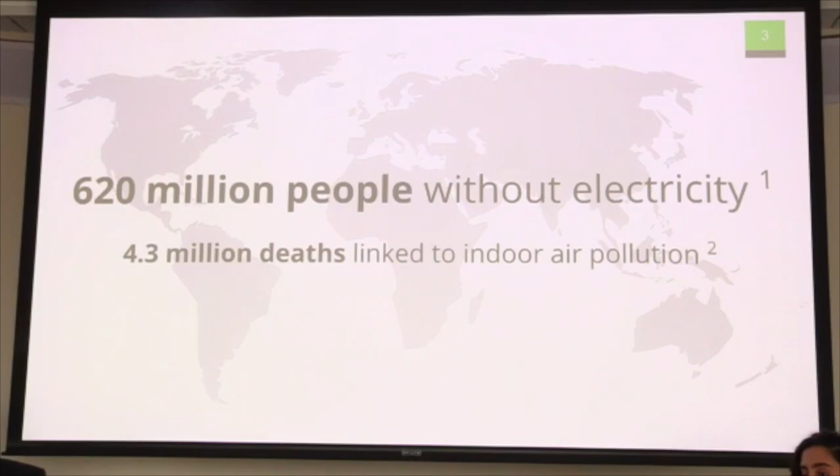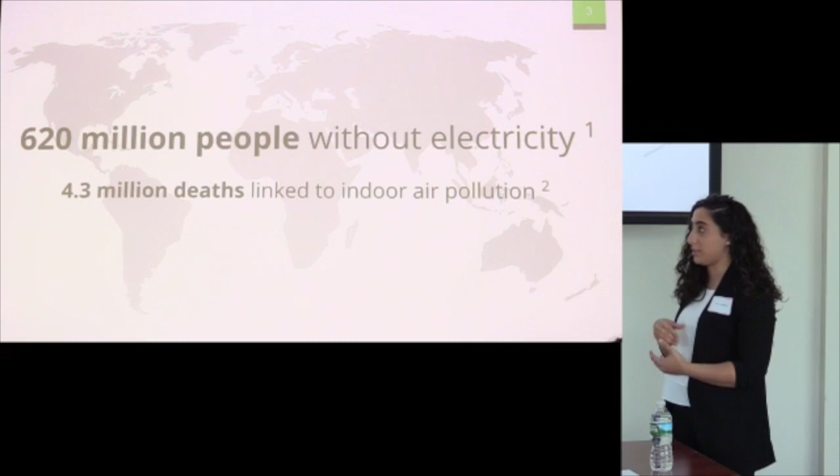It is defined as a lack of adequate modern energy required for cooking, warmth, and other services in schools, healthcare, and workplaces. Currently, there are 620 million people without electricity, and this is required for the continent's effort to overcome poverty. Without this electricity, they rely on the burning of dung, charcoal, and kerosene, which are both dangerous and polluting. This increases the number of deaths linked to indoor air pollution, which the World Health Organization estimates to be 4.3 million deaths.

So who are we? We are Quad A. We're located in Saudi Arabia purely because we're situated in the region and it's easier for us to start up the business there, as well as additional benefits such as cheap rent and low taxes.

So our company is focused on research to deliver electricity in a reliable, efficient, and environmentally sound manner. In the future, we hope to see a world where people all over the world, even in remote locations, have access to clean water and environmentally sound house appliances.

So our objectives come in twofold: product objectives and social responsibility. The product objectives are included in product development, and so we hope to provide users with a reliable, efficient, and inexpensive means for clean energy, a place for proper waste disposal, and a process for non-potable water. This ties in with our social mission of creating awareness for energy poverty, the consequences of improper waste disposal, and the need for proper sanitation.

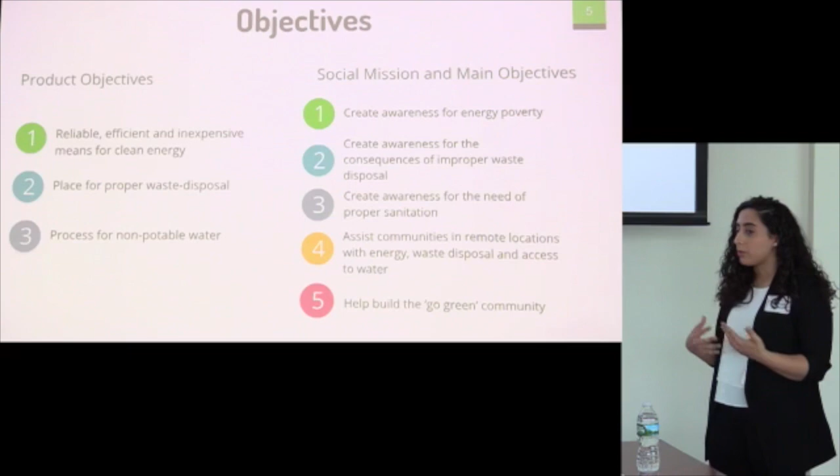In addition, we also hope to assist communities in remote locations with access to energy, waste disposal, and water. And furthermore, we want to help build the Go Green community.

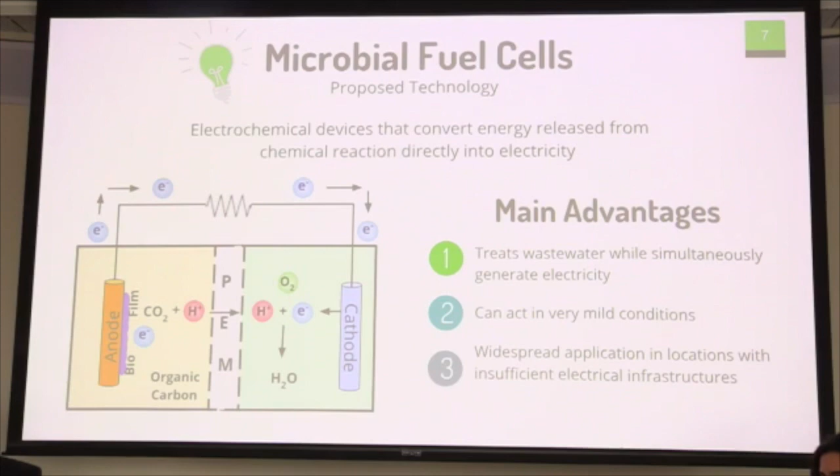Now moving on to the product, we have looked to several products that we think are suitable, but we decided to focus on one of them, which is microbial fuel cells, which are electrochemical devices that convert microorganisms into electricity directly. That comes with advantages.

One, it mainly treats wastewater while simultaneously producing electricity. Also, it can function under mild conditions, so there are no changes in the atmospheric conditions of the device. Its application can be applicable in any location that has wastewater, so it's applicable to areas that lack infrastructure or electricity.

So for this device, it functions as follows. You have two chambers, an anode chamber and a cathode chamber. In the anode chamber, you put in the organic compound, and it reacts and also forms a biofilm around the anode.

Then the electron transfers through the anode, through the electric circuit, to the cathode, then is released to the cathode chamber. It reacts and combines with a proton, which is transferred through the proton exchange membrane to form H2O.

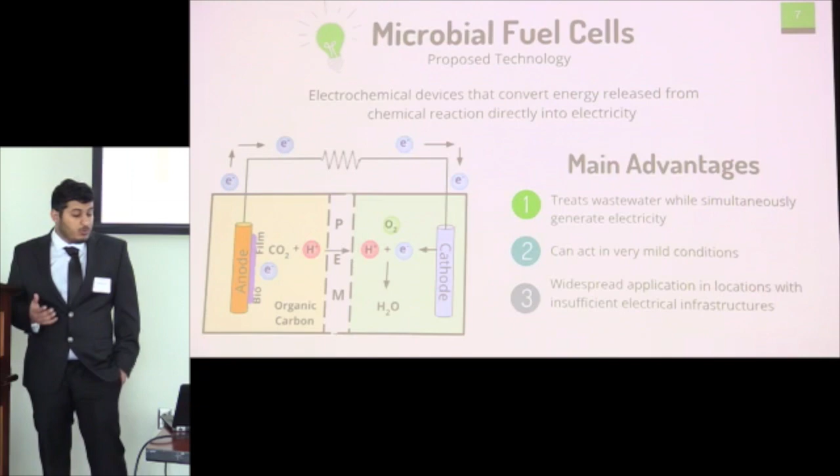So how does all this reaction actually happen? In the anode chamber, we have an anode reaction, which is organic compound plus H2O, forming carbon dioxide, a proton, and an electron.

Then it transfers through the biofilm through three different mechanisms. The first one is direct contact between the bacteria and the anode, and the second is through the nanowires that come from the bacteria, or by a mediator.

Then the electron transfers to the anode through the electric circuit, then goes back to the cathode, where the cathode reaction happens, which is based on oxygen plus 4 protons plus 4 electrons, forming 2H2O.

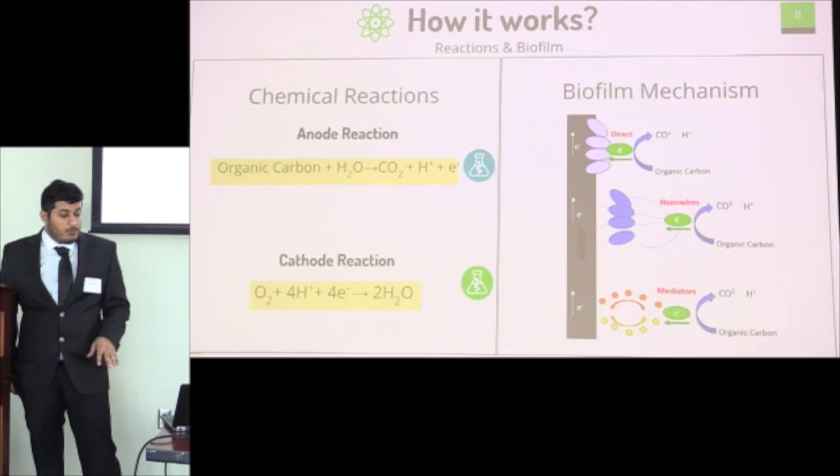All right, so there are several modifications we have applied to our design in order to reduce the cost of our final product while maximizing its efficiency.

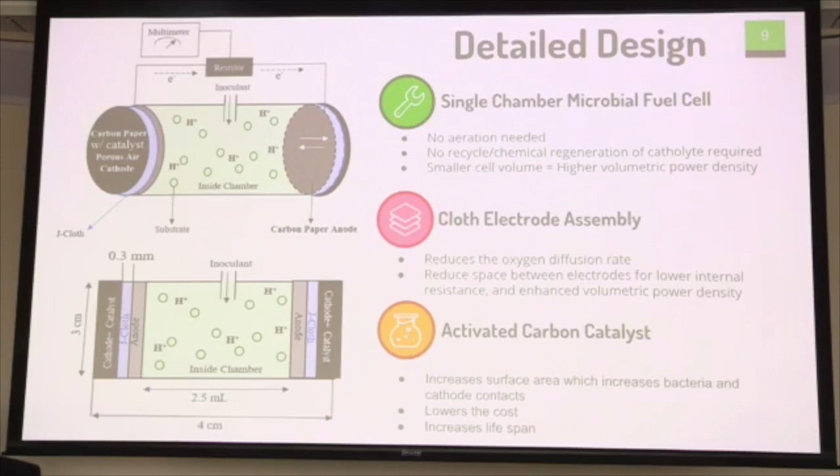So first off, we have completely gotten rid of the second chamber. Typically, when you have two chambers, the cathode is immersed in a solution and has to be aerated with pumps to provide it with oxygen. The issue with this is that it adds to equipment and energy costs.

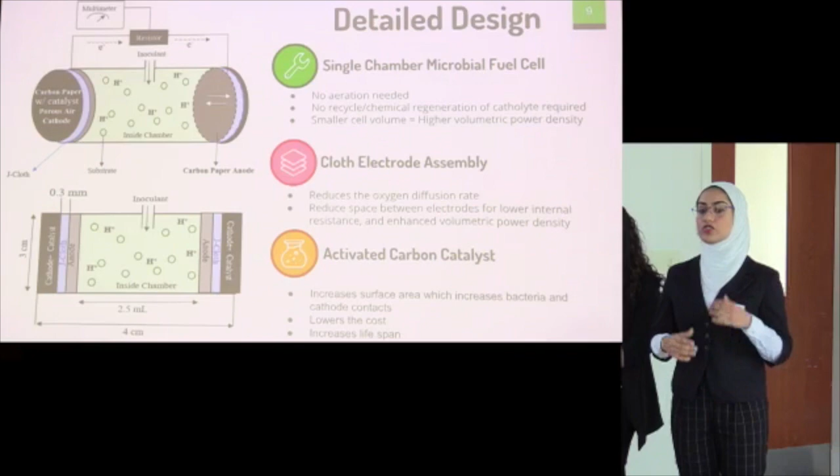So by completely removing this chamber and combining it into a single chamber microbial fuel cell, the cathode is directly exposed to air, therefore no aeration is needed. The second thing that happens is there's no recycling or chemical regeneration required of the catholyte, meaning the operation of the device is simplified. And finally, with a single chamber microbial fuel cell, it is easier for us to achieve a smaller cell volume, therefore allowing us to increase the volumetric power density.

The second modification we have applied is a cloth electrode assembly. The position of the anode and cathode can greatly affect the power output of our system—the closer they are together, the better. However, as the cathode gets closer to the anode, oxygen diffusion increases. This hinders the main reaction and causes a short circuit in our system. So by applying a cloth between the two electrodes, we are not only reducing the oxygen diffusion rate, but we're also reducing the space between the electrodes for a lower internal resistance and an enhanced volumetric power output.

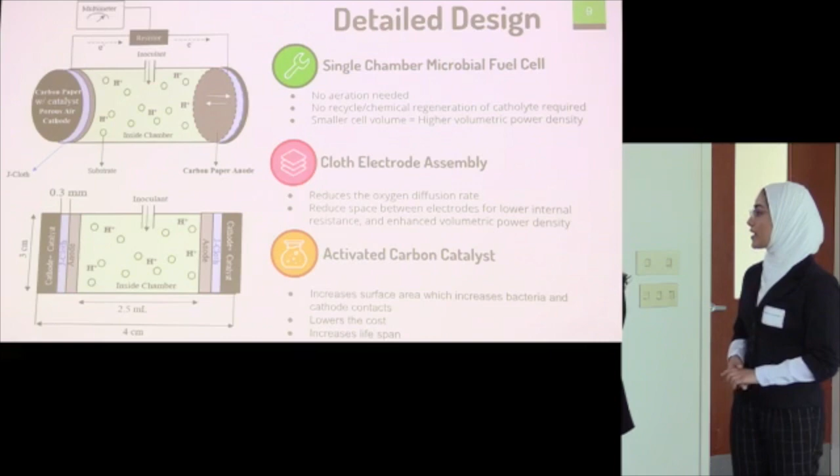Finally, a catalyst is needed to initiate the reaction. Typically, noble metals such as platinum are required, however this can be very expensive. So instead, we will be applying activated carbon as our catalyst for its ability to help increase the surface area, which increases the contact between the bacteria and the cathode. It will lower our costs and increase the lifespan of our MFC.

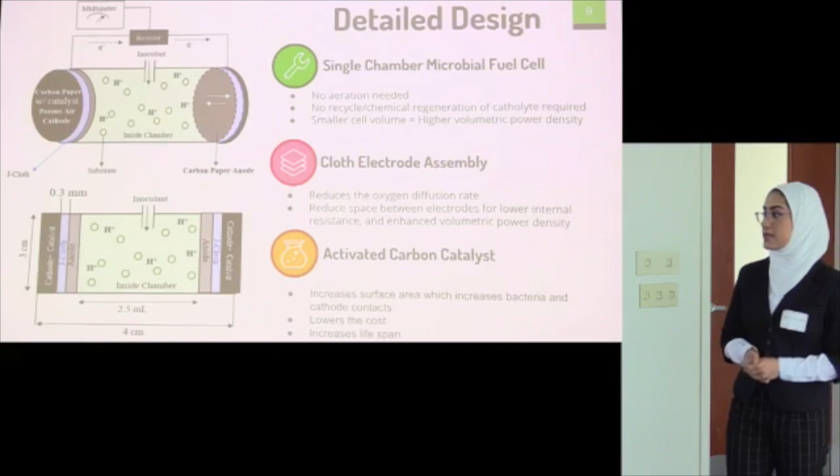The biggest challenge we face with microbial fuel cells is their very low power density, so there are several modifications we apply to increase it. First, research has found that in a single chamber microbial fuel cell, a proton exchange membrane increases the internal resistance of our system. Therefore, by completely removing this proton exchange membrane, we are able to increase the power density 5.2 times. The second thing is the cloth electrode assembly, the CEA. This increases the power density substantially, from 3.7 to 627 watts per meter cubed.

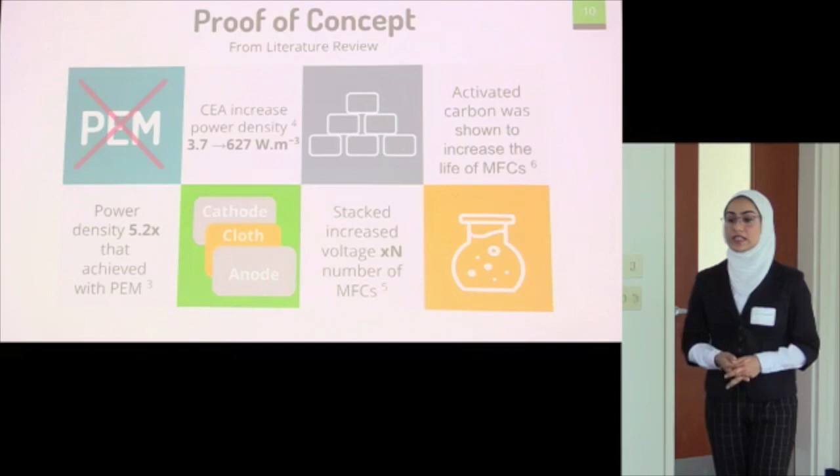The third thing we will be doing is stacking our single units of microbial fuel cells in series. This can help increase the voltage by the number of MFCs—so if I'm using two MFCs that are similar and stacking them in series, I'm doubling my voltage. Finally, a research group at Penn State University led by Dr. Bruce E. Logan has found that applying activated carbon as our catalyst was proven effective in initiating the reaction and increasing the lifespan of our MFCs.

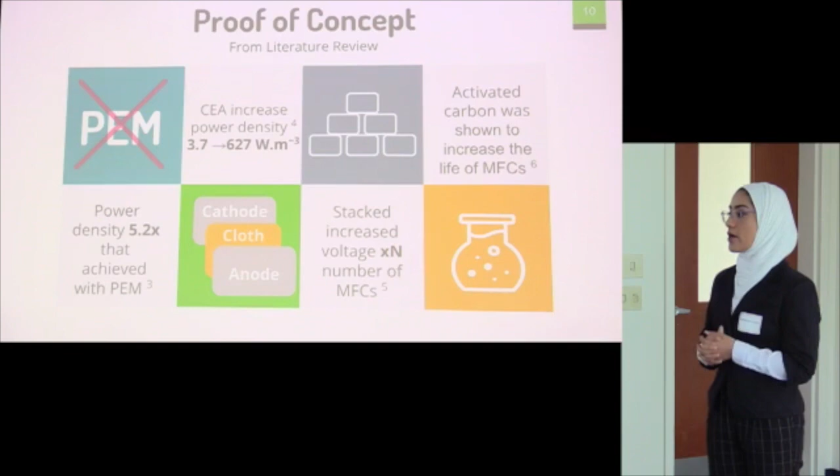Okay, cloth—is it really an electrode or is it a separator? The proton exchange membrane, is that what the cloth is? Okay, so usually in batteries I've worked with, you have an anode coating which helps convert from electronic to ionic. Yes, the proton exchange membrane is the electrolyte separating between the two sets. Yeah, okay, so it's not an electrode? No, it's an electrolyte, yes, you are correct.

There are two governing equations we have been using. First, for the energy equation, we applied Ohm's law to help determine the cell's potential voltage as well as the current output of our system. The second equation we used was the power law to determine the power density of our system—the cross-sectional area here is the cross-sectional area of the anode. The second governing equation is the mass transfer equation. It is important to evaluate the oxygen diffusion rate through the cloth to evaluate its effectiveness, so we used Fick's first law and multiplied it by the cross-sectional area of the cloth to determine that. The lower the oxygen diffusion rate, the better it is for our performance.

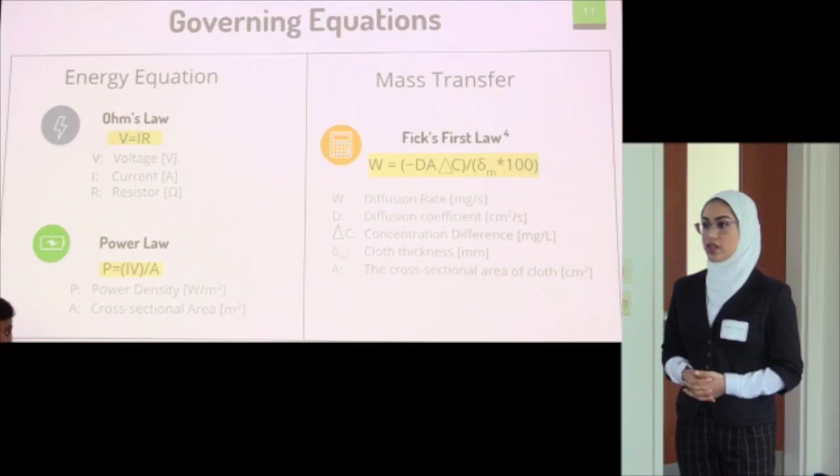And the cloth, you're going to tell me what the cloth is? The cloth is a J-cloth that we will be applying. What's a J-cloth? If you've seen it, it's the same cloth you can use with household appliances—it is super absorbent. Oh okay, so it's a microfiber cloth. Yes, it's a microfiber. But it has to be conductive, right? It does not, or maybe it becomes conductive by absorbing something. So essentially it will not need to be conductive because we will have an electric wire that will conduct that electricity externally. The sole purpose of the cloth is to decrease the oxygen diffusion rate.

But an electrolyte is conductive. The J-cloth is not essentially an electrolyte—in our case, it's not the electrolyte. So it's an insulator between the anode and cathode? Yes. Okay.

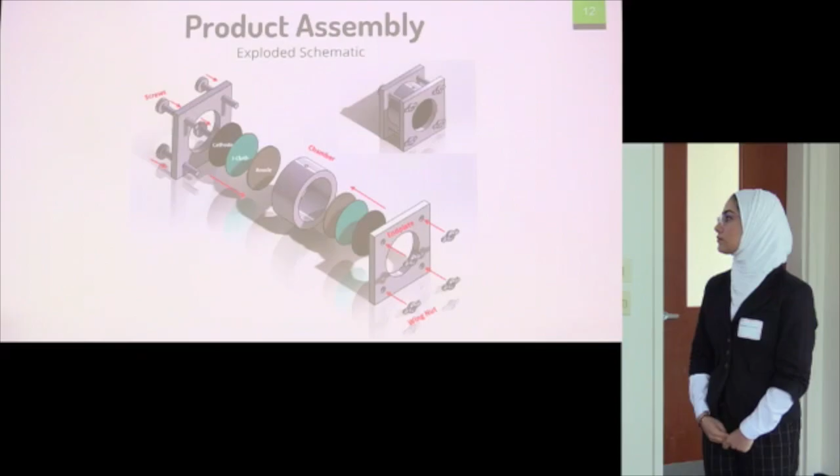Looking at our product assembly, here's an exploded schematic of one microbial fuel cell. As you can see, we have a cathode, J-cloth, and anode on both sides of the chamber. And the top of the chamber, the opening, is where the wastewater will be coming in.

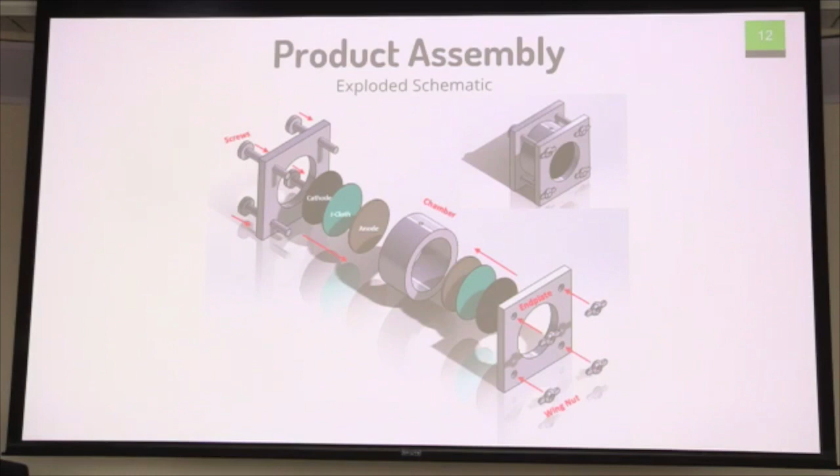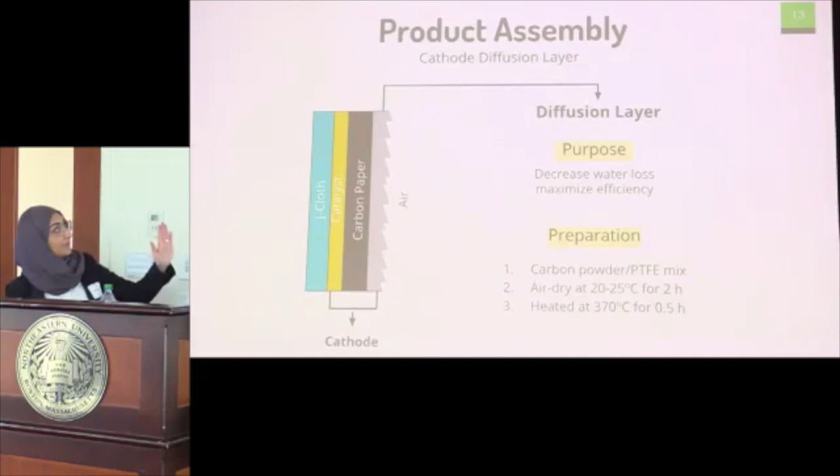Looking closer at our diffusion layer, we're going to be applying the catalyst to the water side of the microbial fuel cell, and applying the diffusion layer on the air side. The purpose of the diffusion layer is to decrease water loss and maximize efficiency.

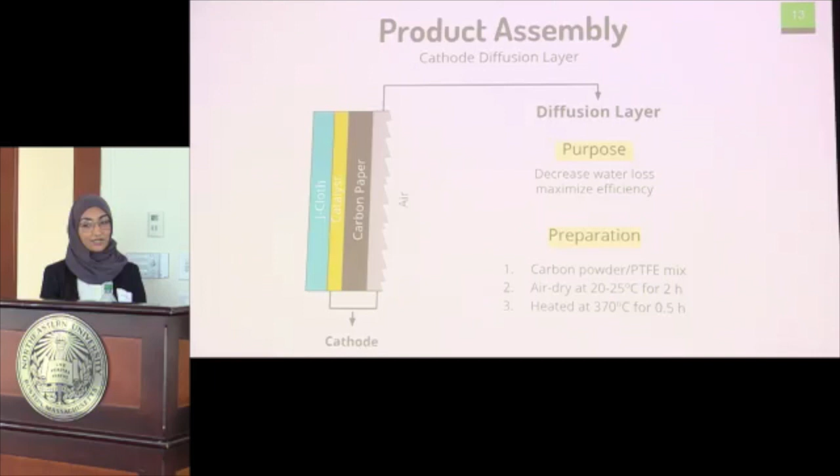We're going to prepare this diffusion layer by mixing carbon with polytetrafluoroethylene, and then applying it on the carbon paper. We'll let it air dry at room temperature for 2 hours, then heat it to 370 Celsius for half an hour.

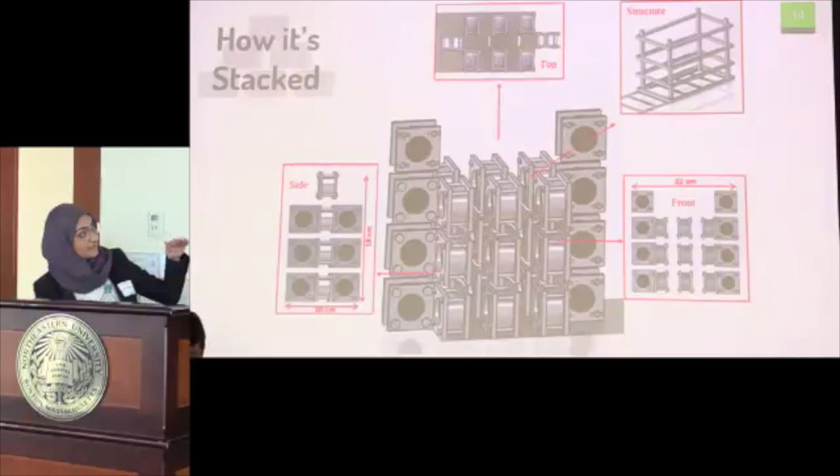Here's our overall design of the microbial fuel cell and how it's going to be stacked. There are a total of 26 microbial fuel cells. It may seem like a lot, but it's actually very small, with dimensions of 18 by 22 by 10. The space between each row is enough for the wastewater to go into the microbial fuel cell.

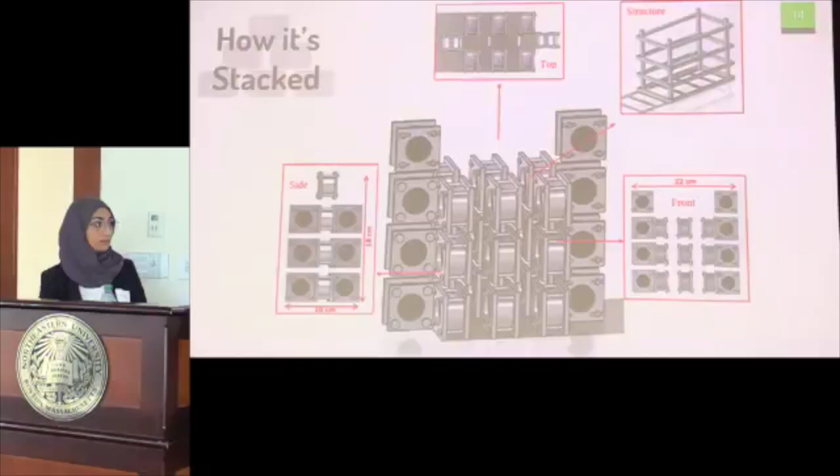Are these for an individual home or something? Yes, so the 26 completely will be. Oh, you mean given to each individual home? The purpose of that, okay, we'll get into that when discussing the market.

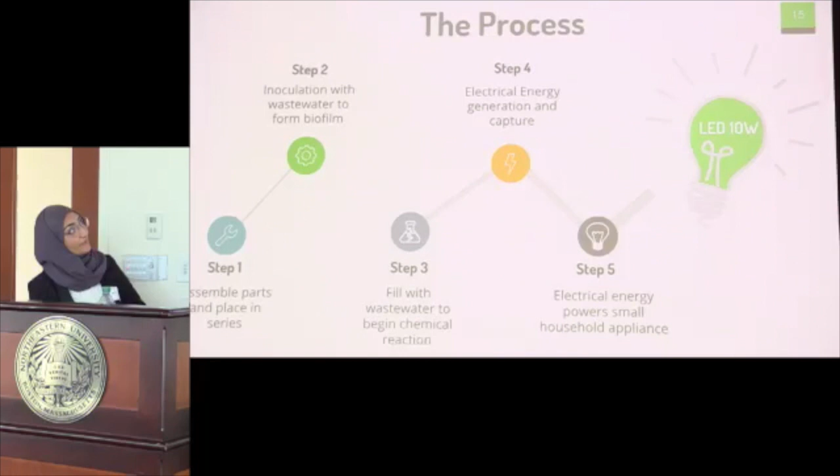The overall process: first, we assemble the parts and place them in series, then inoculate the microbial fuel cell with wastewater several times to prime it and form the biofilm. Once given to the customer, they'll fill the microbial fuel cell with wastewater at their own convenience, beginning the chemical reaction. From there, electrical energy is generated and captured, which is used to power a small household appliance, in this case an LED light.

All right, so let's talk about the market.

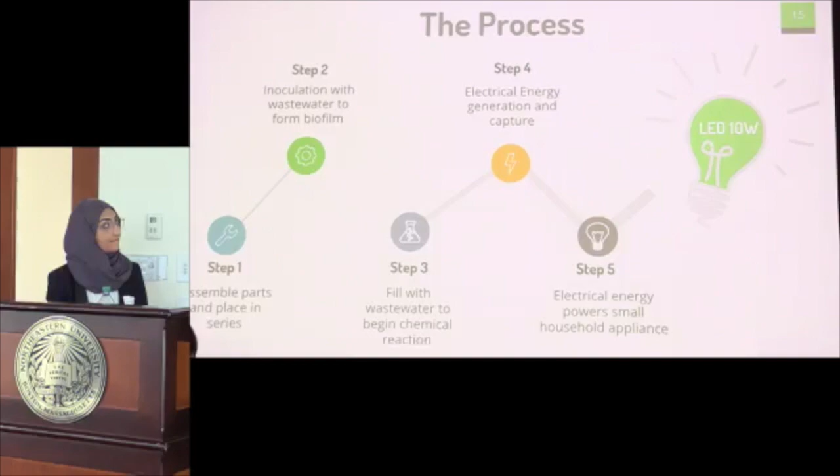Currently, it's estimated the market is worth $9 million, but most of this money is put into research and development. The current leaders are Electrochem Microorganic Technologies, Microbial Robotics, and Cambrian Innovation. Some startups have received sufficient funding for production, one being Aviva Aiden's design for a dirt-powered battery, but we haven't found more information on that technology or how it's been furthered.

In the future, is the current market what is being sold now, or do you mean the global market, the potential market? As of 2017, the total market is worth $9 million. Being sold, revenues from sales? Yes, in terms of paid patents and copyrights and those kinds of things, but there are very minimal products out there in terms of the market. Usually when we talk markets, we talk about what the sales are. Worldwide sales. I understand, well I guess because most of it is still in research and development, we don't have much information on how much sales it's producing. Okay, well then I don't know what the $9 million is.

It's just the money that is invested. The investment is fine, yes, I wouldn't call it a market. In the future, the investments are estimated to be worth $18.6 million by 2025. This is promoted or driven by legislative environmental regulations, the need for new water sources, and the non-renewable fuel crisis.

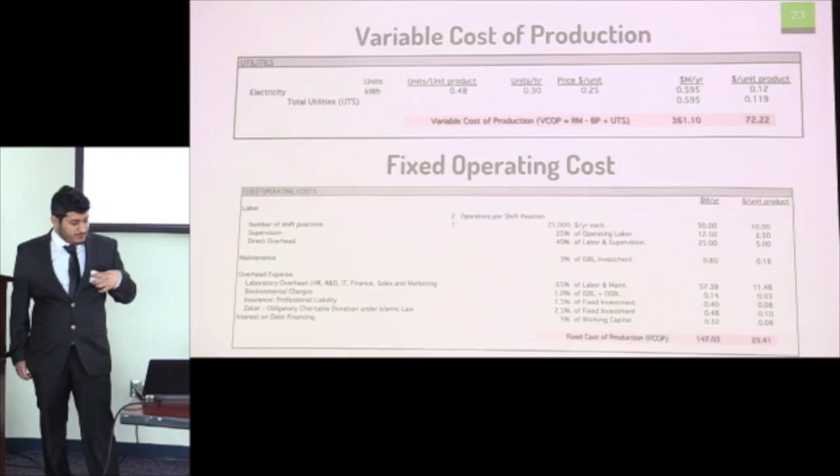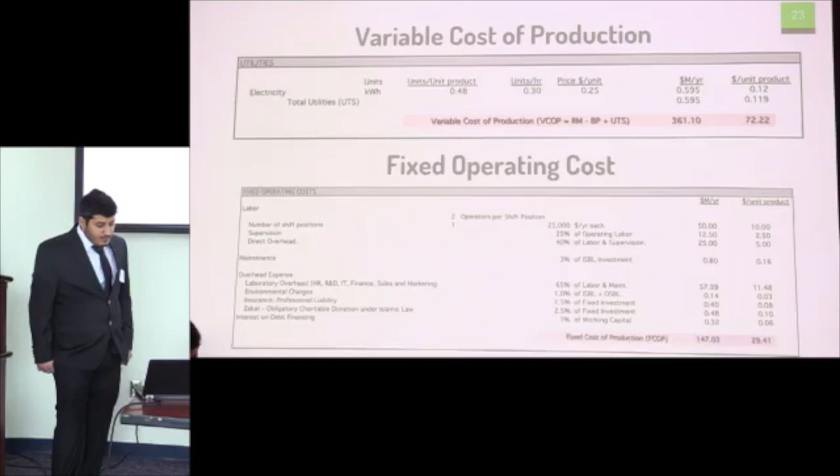What does the person earn, is that $25,000 per shift? How many people do you have in this company, other than us? To assemble them, we have 2 people working per shift, it's a very small lab. So you have 6 people in the company? Yeah, basically, it's a startup. So you're devoting yourself full-time to this company, right? Yes. What are you earning? I think the minimum wage in Saudi was 25,000... 20,000, yeah, but we were making over that, by $7,000. So you're each earning $27,000, that's your salary. Yes. And your overhead over the salary looks like it's 25 or 40%. I'm not sure what you mean there.

But for benefits and that kind of thing, it usually runs about 40% over your salary. I guess because we are a social entrepreneurship, we're more concerned with giving back to the community. Our main aim is the social mission rather than revenue, so that's why our numbers aren't as high as they could be. So it's good if you have another source of funding, and I also know the government supports startup companies with a large amount. We probably did not include that because it's not available data to ask for. Oh, we also, in Saudi Arabia, we don't have taxes, so all the money we get is all the money we get to keep.

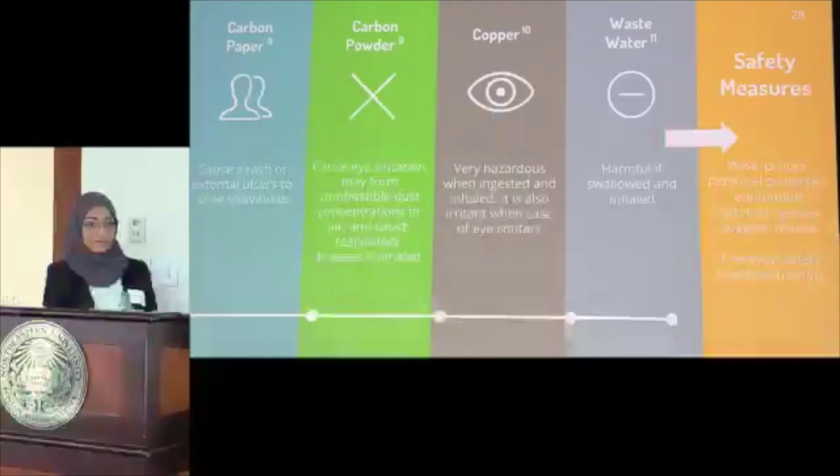Now moving on to safety, health, and environmental considerations. After looking at the MSDS sheets for each component, we found there aren't major health or safety concerns for each one in terms of corrosion, toxicity, and instability.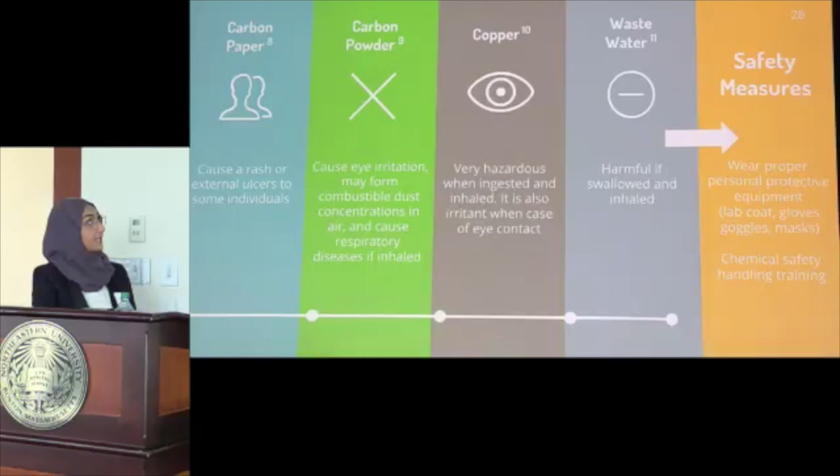However, these are our major components: carbon paper can cause a rash or external ulcers in some individuals. Carbon powder can cause eye irritation and may form combustible dust concentrations in the air, but it's qualified as weakly explosive, and can cause respiratory diseases if inhaled. Copper is very hazardous when ingested and inhaled, and is also an irritant when it comes into contact with the eyes.

Wastewater is harmful if swallowed and inhaled, so proper cleansing has to be exercised right after handling it.

Copper is used for the electrical circuit, and carbon wires and paper are used for the electrodes.

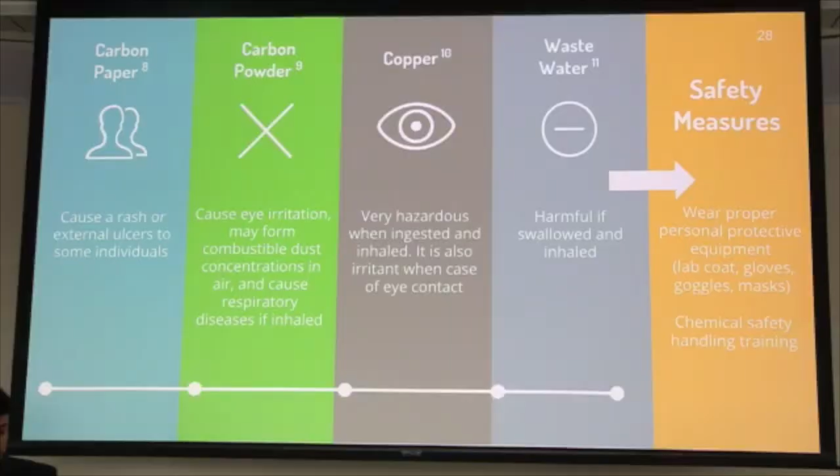The safety measures we're going to be taking are that all lab personnel and management will wear proper personal protective equipment such as lab coats, goggles, masks, and gloves, and all lab personnel and management have to go through chemical safety handling training and a course.

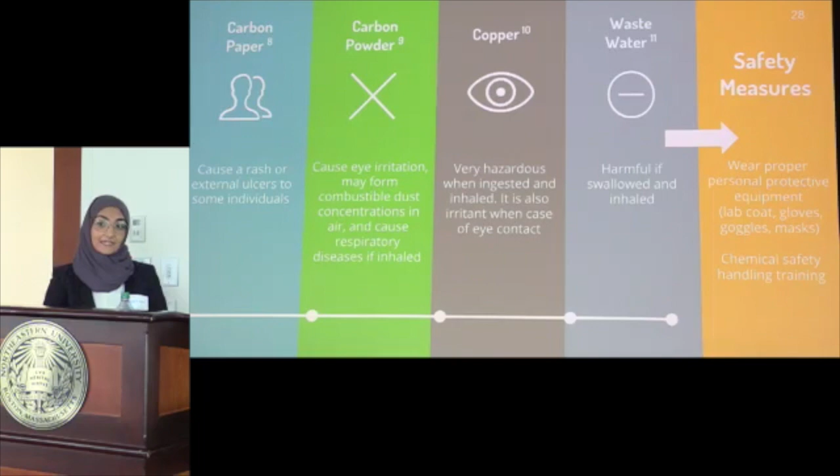After doing the safety failure mode effect analysis, we changed some of our design controls in our system. For example, we added insulation and a pH detector, so we don't go out of the acceptable range of temperature and pH.

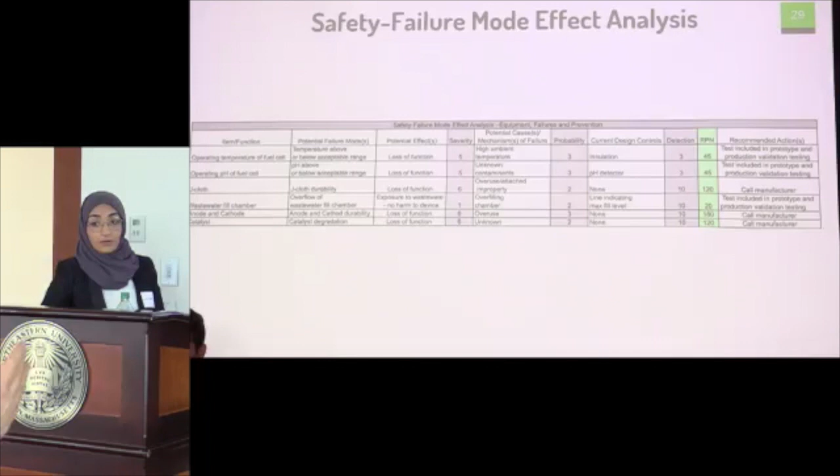Did you choose a critical RPN, something above which you redesign? So you kind of need to have a critical RPN. I believe we did assess that. So what's acceptable is in the green.

For regulation considerations, since no food or drug is being used or produced during the production of our MFCs, we don't need FDA approval.

The only regulation consideration we need is environmental considerations. In Saudi, we don't have as strict environmental regulations as we do here, but we individually care about the environment, so we decided to follow the Environmental Protection Agency's regulations.

The first thing we need to do is obtain a permit to prove the safe discharge of materials during production. Quad A is also going to outline comprehensive plans with the Ministry of Environment and Agriculture to manage and regulate our waste once our facility is set to open.

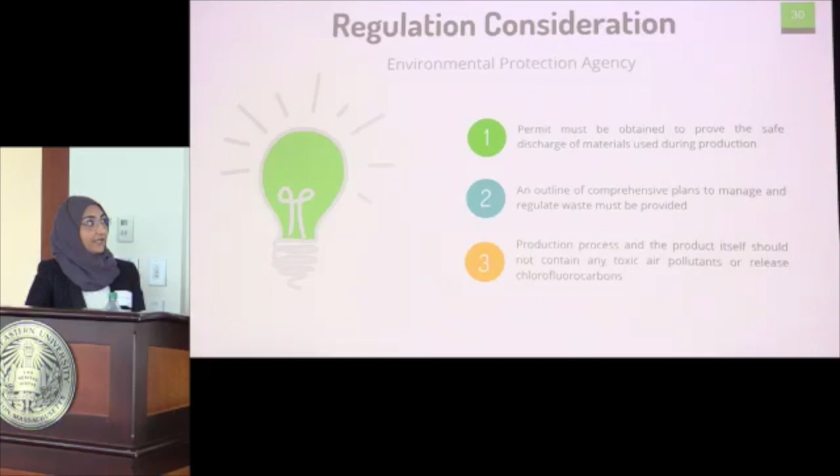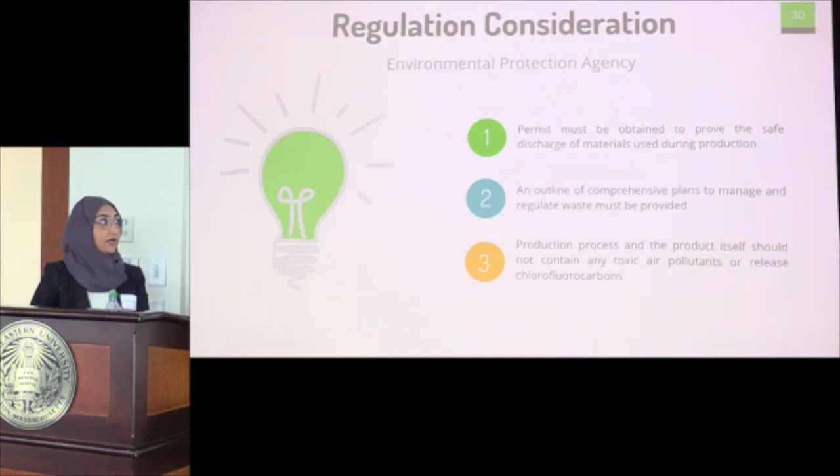Our production process and our product itself don't contain any toxic air pollutants, and we don't release any CFCs, so we are in compliance with the Clean Air Act.

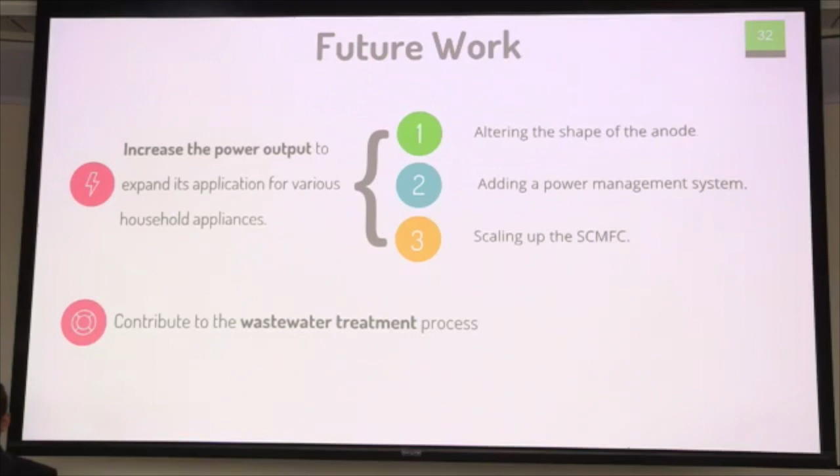For closing remarks, in the future Quad A Technologies hopes to further increase the power output of our devices in order to expand its applications for various household appliances. This will include modification of the device and further testing, including altering the shape of the anode to a brush configuration, as it has the potential to increase the porosity and help with biofilm attachment and electron transfer.

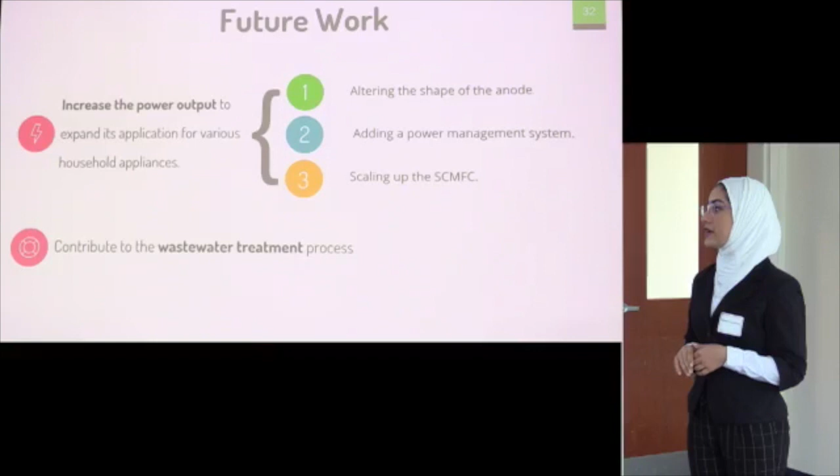The second thing is we would like to add a power management system in order to store the energy and boost the voltage. Third, we'd like to scale up the single chamber microbial fuel cell to increase that power output. Finally, Quad A Technologies hopes to contribute to the wastewater treatment process by applying a scale-up design of our system to create a self-sustained wastewater treatment plant.